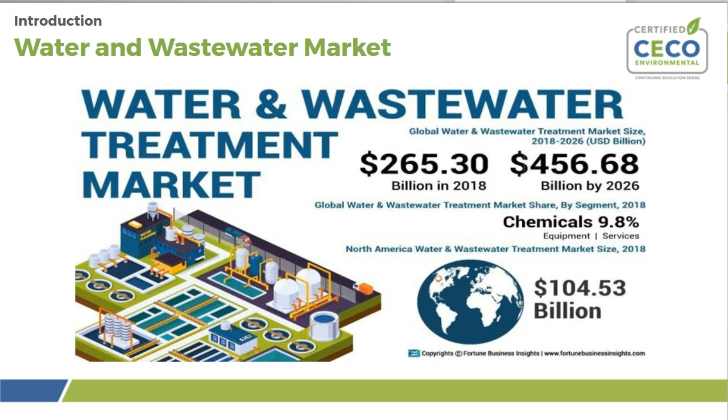Here are some high-level overview facts, some of which may be a bit surprising unless you do a lot of Googling. For example, each American uses 82 gallons of water a day in their homes—that's a lot more than I realized.

Looking at the next one, 22.5 trillion gallons per year of wastewater are generated in North America, with 16.1 trillion of those treated—which makes me wonder what happens to the other 6.4 trillion gallons. Reducing that number is part of why the wastewater market needs to, and is, growing at the rate it is.

The next point: 80% of water used in the U.S. is for irrigation or thermoelectric power plants. That makes me think of just how much water is being used. If individuals are under the 20% mark, and 80% is used by just that industry, it really makes you think about how much water we're actually using.

Then there are some other interesting facts, including almost 1 million people in U.S. cities lacking sustained access to basic sanitation and wastewater treatment, and a little over 600,000 people in U.S. cities lacking sustained access to clean water.

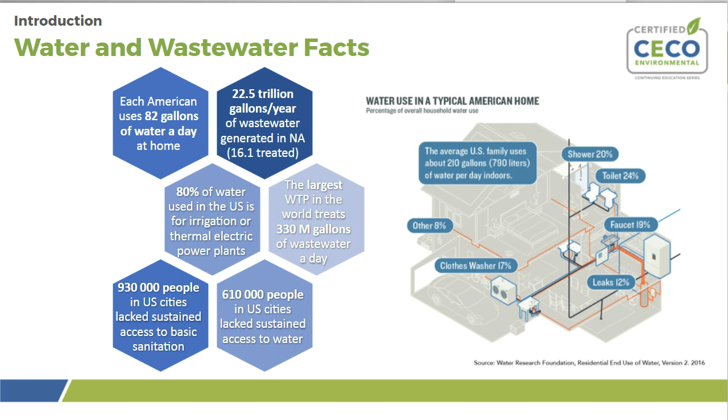So I'm going to break a presentation PowerPoint rule here, and I am going to do some reading off of this slide. But the reason for that is I'd like you to pay close attention to the visual on the left side here, just as an overall understanding. This doesn't address everything, and it definitely doesn't get into all the fine details, but it gives you a good visual understanding of all the ways water is used in our society, where it goes, and where it comes from. So let me read on as you continue studying that visual.

So I want to describe the difference between water and wastewater and the types of treatment. Wastewater treatment refers to the physical, chemical, and biological processes used to remove pollutants from wastewater before discharging it into a body of water. On the other hand, water treatment refers to raw and untreated water obtained from an underground aquifer, usually through wells, or from a surface water source, and then it's pumped or flows to a treatment facility, ending with potable drinking water.

So again, just to highlight that visual on the left, it makes you wonder how big this infrastructure is, how it's all tied together, and whether we as a society are doing everything we can to ensure we're making the right decisions here, capturing the water as best we can and not wasting it.

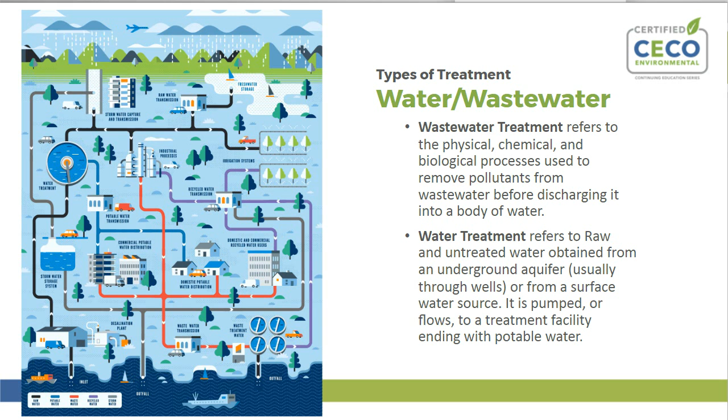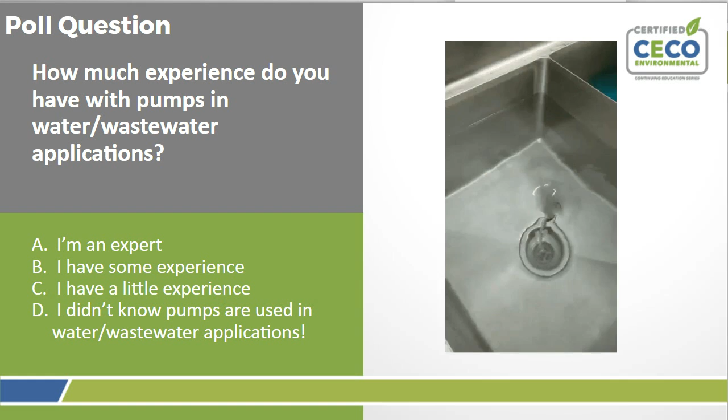So we're up to our first poll question. You'll be able to answer in the next slide. Just hold on a second. The question is: how much experience do you have with pumps in water and/or wastewater applications? A, I'm an expert. B, I have some experience. C, I have little experience. Or D, I didn't even know pumps are used in water or wastewater applications. You can place your answer here, and after selecting, don't forget to hit the submit button.

All right, let's see what the answers are at this point. Very interesting. So we have a few of you that are experts and over 80% that have some experience. That's really good, because this presentation will go a little bit deeper into the pumps. But even for those in the 'discovering this' category, we're still taking a high-level approach, so I think all of you will find this very beneficial.

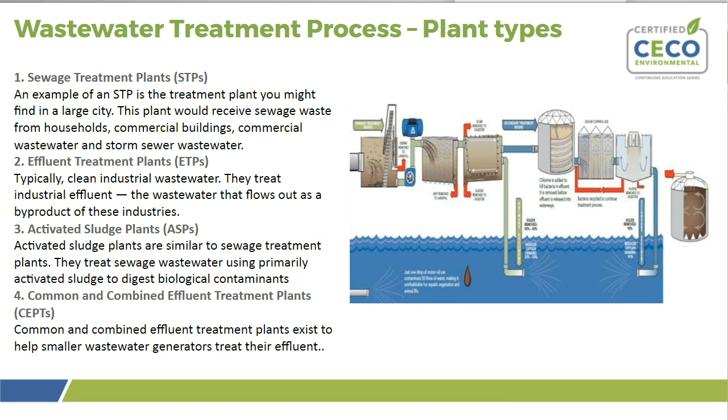So it's broken down, and we started looking at what a wastewater treatment plant is, from both an industrial and municipal wastewater perspective. Industrial wastewater, although many components are the same between the two, really covers the mechanisms and processes used to treat wastewater produced as a byproduct of commercial activities. In a lot of cases, the industrial wastewater is then converted either for reuse inside a process at a mine or power plant, as cooling water, or it's released to a sanitary sewer or back into surface water in an environment such as a river, stream, lake, or aquifer.

Municipal wastewater is a little different. We commonly refer to that as a sewage treatment plant, where water is treated to remove a lot of solids, and it's conveyed in a combined sewer or sanitary sewer and treated at a wastewater treatment plant. So, like I said earlier, we're going to separate wastewater and wastewater treatment from water treatment and keep those separate. Although in some cases they're the same, for our example today we're going to talk about wastewater treatment plants discharging their effluent into lakes, streams, or aquifers.

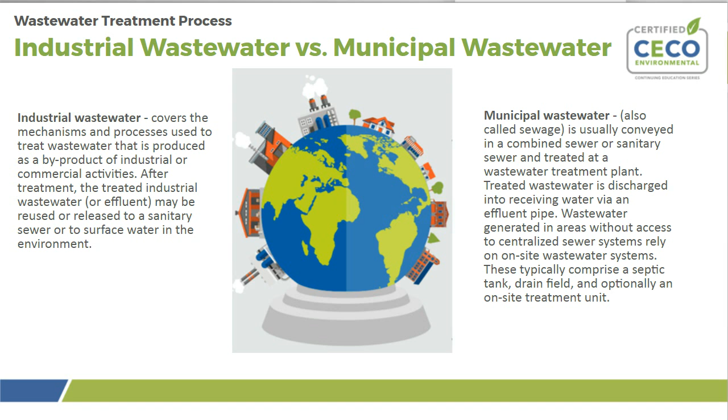When we looked at this fairly significant market, one we're all used to and don't quite understand as much as we probably should - I know that's the case for me - I really looked at trying to break down the sections of pumps and wastewater and where they apply. There are a plethora of different types, and a plethora of applications that relate to where these pumps are applied.

We're not going to go through this a lot in detail, from both a centrifugal and a positive displacement standpoint. There's a lot of information here, but there's primarily two basic pump types that are used: centrifugal and positive displacement.

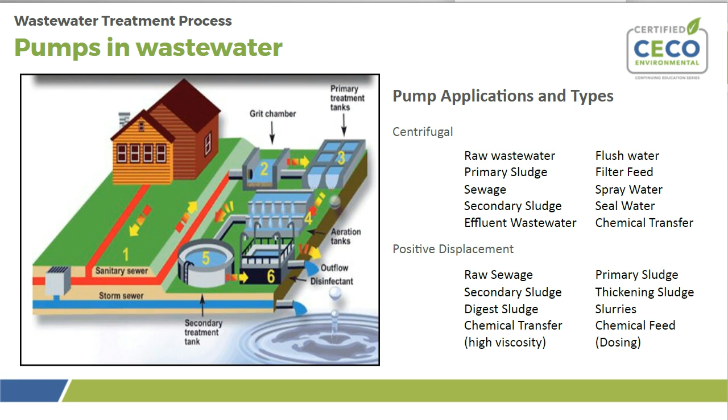One of the things, at least in Canada - I'm not so sure it's the same in the US - is combined versus separated sewers. Combined sewers carry both stormwater and wastewater, and separated sewers are either sanitary sewers or storm sewers.

That makes a huge difference, as we have issues in cities, especially around our coastal cities, where our storm sewers or our sanitary sewers are overflowing, and storm sewers now are being contaminated with human excrement and things that shouldn't be in our water streams. So part of the growth in water wastewater overall is looking at migrating more to combined sewers, so that all water is treated, not just sanitary sewer water.

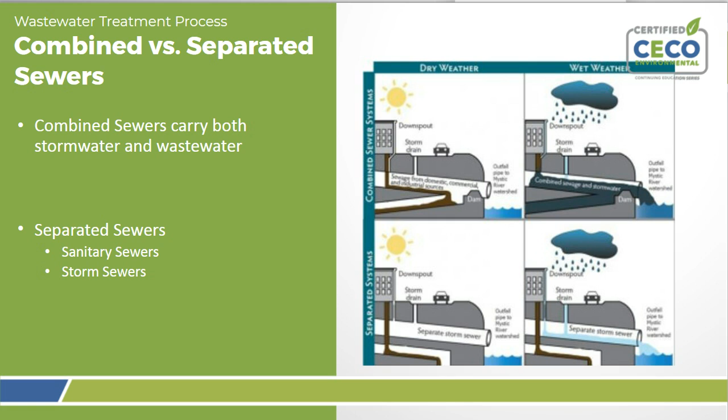A couple of interesting things we've learned along the way is the difference between influent and effluent. Influent is the water that flows in, so raw, untreated water. And effluent is the sewage or industrial liquid waste that is released into natural water by sewage treatment plants or structures that treat industrial water. Kind of interesting - I always thought effluent meant the same thing regardless of application or process within the wastewater treatment process, but that's not true.

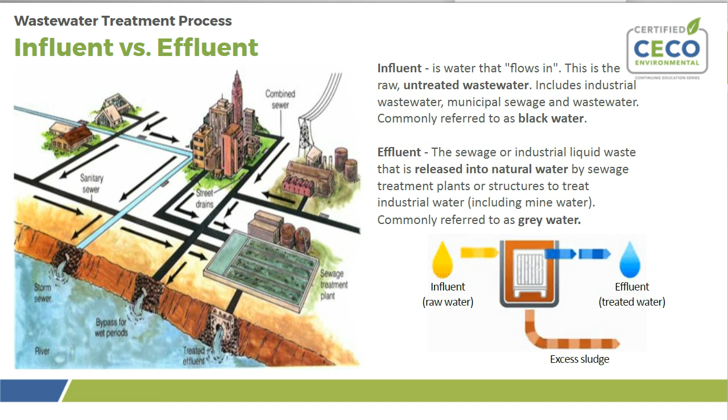So let's get a definition of wastewater treatment. A treatment plant uses a series of treatment stages - primary and secondary - to clean water so that it is safely released into a lake, river, or stream. So we're looking at a waste treatment plant not having the additional stages and purification of drinking water. We're looking at it from a perspective of waste treatment, taking influent and allowing it to become effluent, to be released in a number of ways, and that could be to a waste treatment facility.

So primary treatment removes about 60% of the suspended solids from water. It also involves aerating, putting oxygen back into the wastewater, screening, pumping, aerating, removing sludge and scum, killing bacteria, and handling wastewater residual solids. Then the secondary part of the treatment removes 90% of the suspended solids.

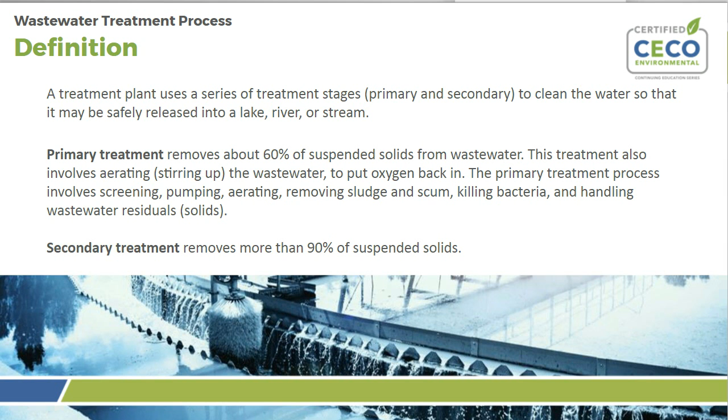If we look at a wastewater treatment plant, here's a picture of a typical wastewater treatment plant, broken down into 10 primary steps. I'll take a quick deep dive into what these steps are through the process on the next slide.

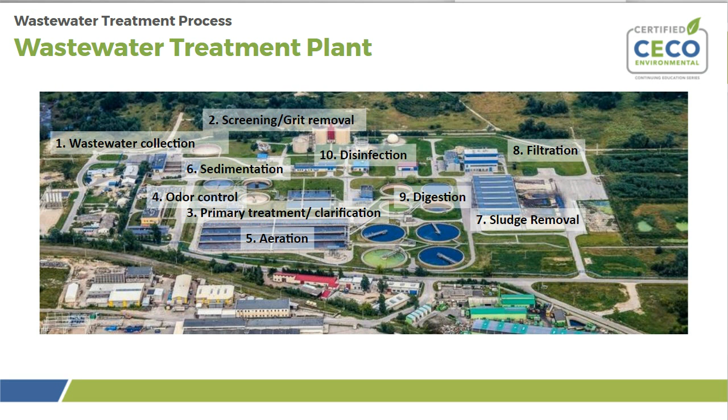It really starts with wastewater collection - that's from industrial and municipal storm sewers, wastewater and sewage on the influent. So it's collecting all that and making sure it gets into the actual wastewater treatment plant itself.

A real important stage is screening and grit removal, which is moving the water through screens to separate the larger trash and solids. A third part of the process is primary treatment, or primary treatment/clarification. This is basically settling - it allows materials to settle to the bottom, be scraped off, and be disposed of as a treatment after drying. The fourth component is odor control.

This is something over the last 25 years that's really gained a lot of ground, especially as wastewater treatment plants are being surrounded by residential areas. So the need to reduce odors is becoming more and more pronounced.

Aeration is the fifth step. It provides oxygen to bacteria for treating and stabilizing the wastewater - a real important step in the process to break down organic matter, containing carbon, and form carbon dioxide and water. The sixth step in the process is sedimentation.

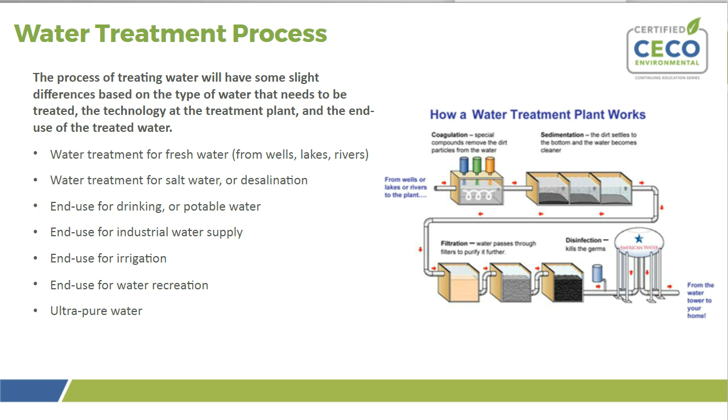Quick definition: water treatment, or treating the water, improves the quality of water to make it specific to the end use, as I just described. The treatment process is fundamental to human health and our well-being as a society. And as I mentioned, the overall focus of this is going to be taking water, raw water, and then cleaning it to a potable use application.

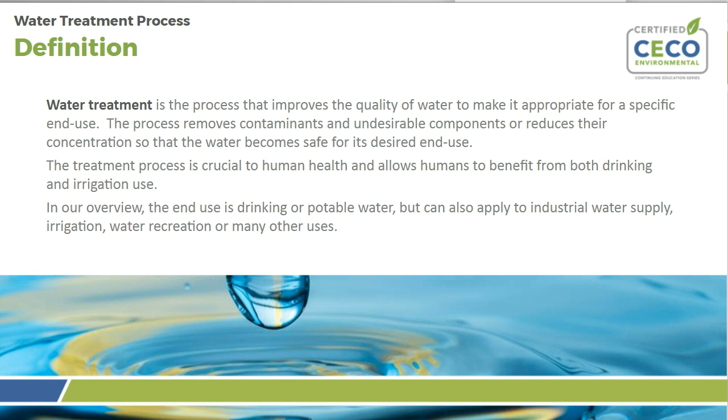So a water treatment plant, very much similar to the picture shown before—again, a little bit less infrastructure to support water treatment than wastewater treatment. Again, very important to us as a society; clean water is just a really important topic in general. As mentioned before, 82 gallons a day used by a household in the U.S., and globally it's somewhere around 16 gallons a day. There's no lack for the need of clean water every day around the globe.

So we'll start with some of these treatment processes at number one, raw water intake. As I mentioned before, there's a reduction in steps, so a little bit cleaner as far as the process goes. Raw intake water can be anything from an aquifer, as mentioned, and that water is pre-treated through a set of screens and some pre-filtration to remove the coarse solids. This is very similar to the intake pump or intake process on a wastewater treatment—there's different pre-filtration taking place to get rid of the big items.

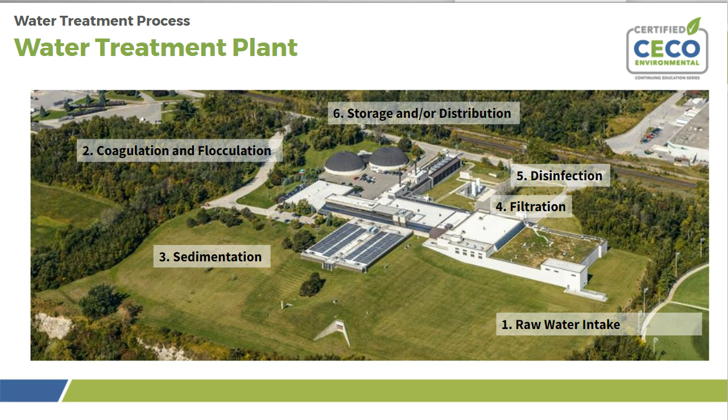I'm going to go ahead and skip this slide, everyone. That was summarized in the previous one, but these are the steps I went over, here for reference in the future.

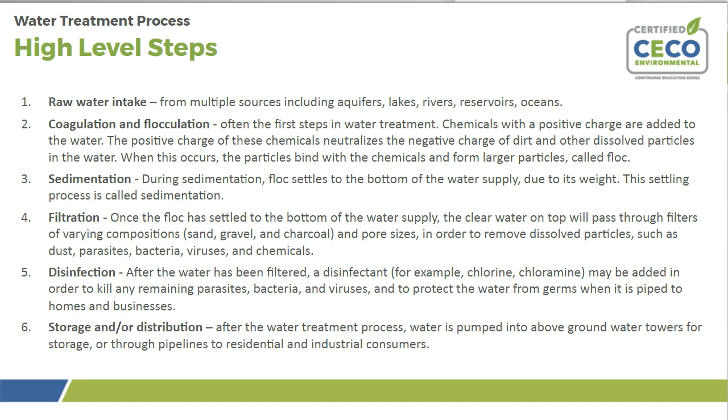So we're going to move into desalination now, but there's some interesting facts to share, to emphasize how important this topic is. Only 1% of the water on Earth is fresh water that's easily accessible - that's water from aquifers, rivers, and lakes. There's also some fresh water that's not easily accessible on a regular basis, tied up in glaciers and things like that. The other 97% of water is some sort of salt water or brine, mostly found in the oceans around the globe. Obviously desalination is really important to us as a society moving forward with population growth. There's always going to be a growing need for clean drinking water, and a lot of that's tied up in a fluid that's not drinkable in its raw state. So desalination is extremely important to us.

Some other fun facts here that are pretty interesting, that I didn't know until I started digging deeper: 1 in 10 people in the world lack a source of clean drinking water. That's sort of mind-boggling in and of itself.

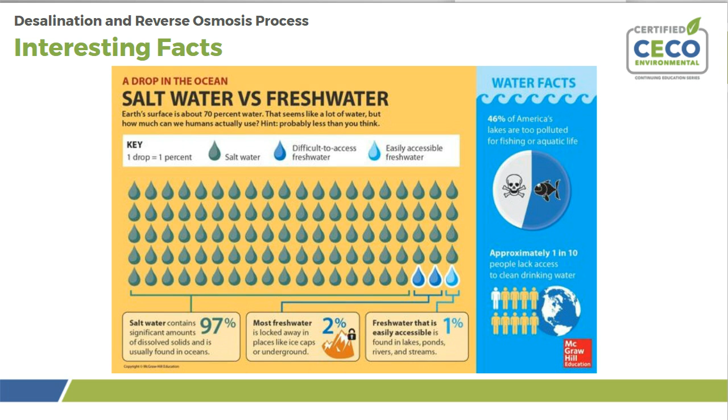So a quick overview of the desalination process. Again, it's not entirely different than what we just spoke about at the first part of the process. We'll get into that in a minute.

Currently there's approximately 95 million meters cubed per day of water coming from desalination, from 16,000 operational desalination plants in 150 countries. So desalination is a big part of what we're talking about as far as treating water. They're treating 95 million meters cubed per day, which is 17 million gallons per minute. But in the public water systems, which are mostly the traditional water treatment system I just discussed, there's over 34 billion gallons of water a day produced. So desalination is just touching the water treatment piece, with respect to gallons per day or gallons per minute. There's a lot of water that could be taken from desalination that's not clean water today.

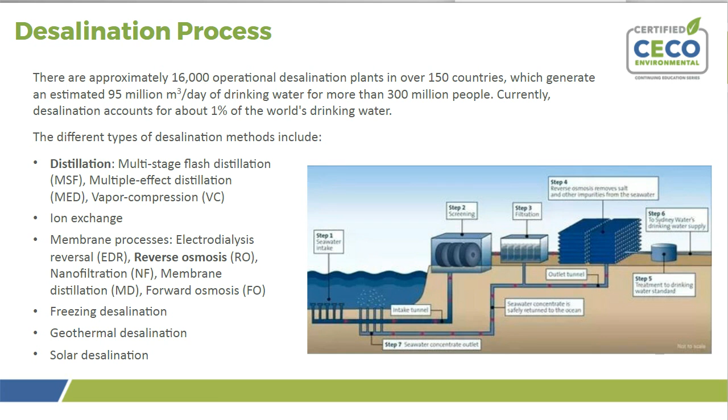Desalination, again, it's just a reminder. It's where we remove solids out of salt water through a couple different methods, distillation or a membrane process. And most of the activities today are focused around desalination and making them more cost effective. Again, these are more expensive processes to operate as compared to a traditional wastewater treatment plant.

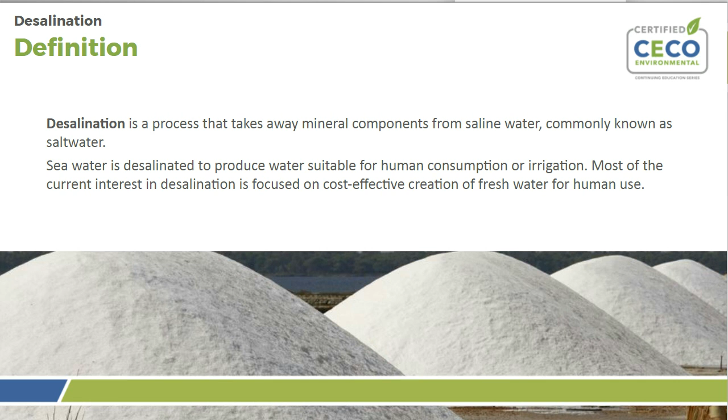It allows the passage of water molecules through, but not the majority of the dissolved salts or organic materials or bacteria that are in the water. Again, a very high energy requirement process. So again, your costs tend to be higher on this type of plant.

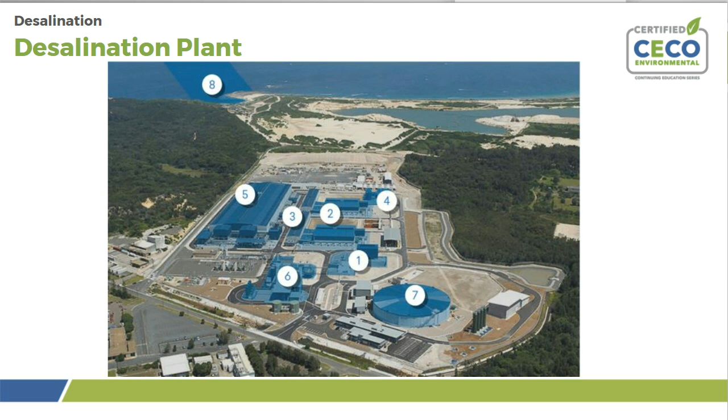And then finally, number 8 out here, there is waste that comes off of this process, some in the form of solids, in between steps 3 and 5, where a sludge is removed. And then after it's all said and done, the brine is pumped underground out to sea, or it can be piped overground, but in this case it's a tunnel or a pipeline that's dumping the brine from the final end of the process into the ocean. Again, this is a slide that covers what I just went over.

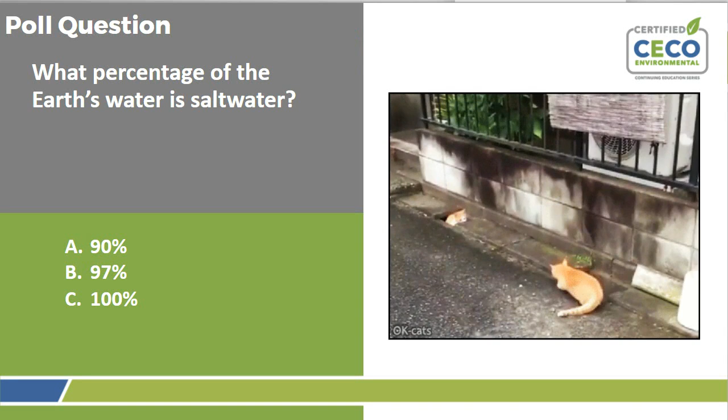All right, thank you so much, Steve. We are at our last poll question, so that's an easy one. I'll just switch over to the answer so you can fill it. So what is the percentage of the Earth's water that is salt water? Either 90%, 97%, or 100%. I'll wait a second, sorry.

All right, so let's have a look at the result. That should be an easy one. 97% majority. So the answer is 97% salt water. So that's why it's so important to look at desalination processes. All right, won't take longer. Mike, take over and talk to us about pumps.

Well, good afternoon again. One of my favorite subjects in the whole wide world is talking about pumps. So, we've got some good information to share with you, kind of related to the topic of today's meeting. I hope you found the information we provided so far useful and informative. But let's talk about pumps. I'm going to do a high-level overview based on pumps used in water and wastewater.

So, a pump is a device that moves fluids, liquids or gases, and sometimes slurry by mechanical action, typically converting from electrical energy into hydraulic energy. Pumps operate by some mechanism, typically reciprocating or rotary, and consume energy to perform mechanical work moving fluid. That's pretty straightforward. I think that's out of Webster's Dictionary.

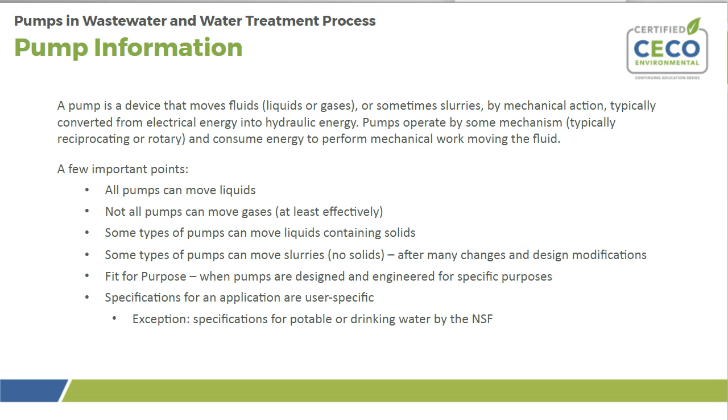Most of the time, from a specification standpoint, those are end user specific or design engineering specific. There's a number of ways to accomplish a single application or process on a number of different pump types. There's one major exception in the United States and somewhat in Canada, as we follow a lot of U.S. certification: potable water or drinking water needs to meet NSF, and I'll talk about that in a second.

So what is NSF? NSF was founded in 1944, called the National Sanitation Foundation. It really is about creating and maintaining rigorous industrial standards. One of the standards is NSF/ANSI 61, and it really refers to drinking water system components and the standards which they must meet. Part of that specification is specifically related to pumps and how they're constructed, materials, that kind of thing. So for the most part, there's no real standards as far as what pumps are placed in particular applications related to water and wastewater, except when we start talking drinking and potable water.

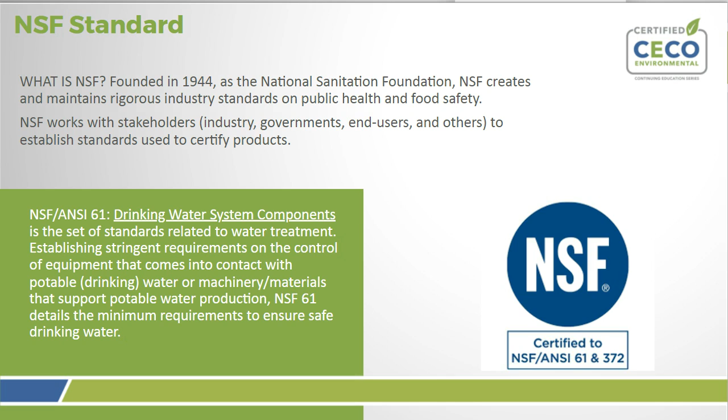So let's talk about pump types in wastewater treatment. Really, again, there's two primary types. One is centrifugal, and two is positive displacement. Centrifugal pumps are by far the most common in any industry, representing about 82% of total pumps consumed in any application, which is probably a little higher percentage when we start talking about pumping sewage and influent. A lot of these pumps are installed in pits and sumps and can easily transport suspended matter, as in sewage.

Some of the pump types that you will see in wastewater treatment are axial flow, submersible grinding pumps, vertical sump pumps, solids handling, self-priming, non-clog, chopper, shredder, recessed vortex impeller pumps, screw impeller pumps, and vertical turbine solids handling. Again, remember, this is referring to wastewater treatment. But in addition to centrifugal pumps, there are applications that are better suited with positive displacement pumps. Some of those are reciprocating, rotary lobe, progressive cavity, and diaphragm, whether that be mechanical or air.

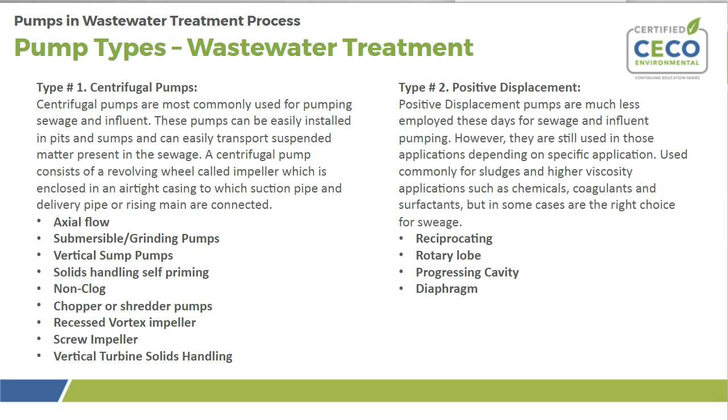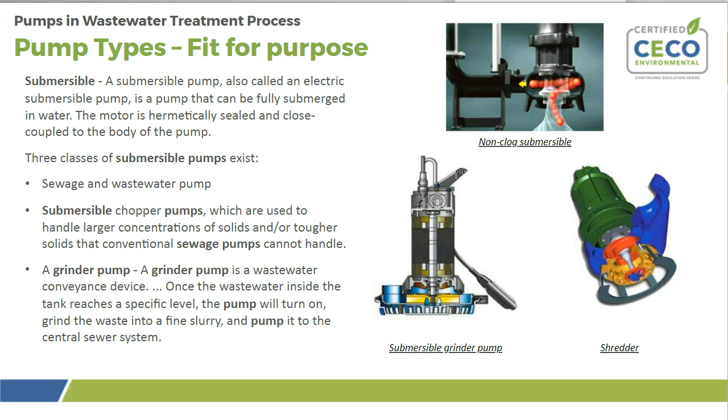There's submersible chopper pumps, which are used to handle larger concentrations of solids and hard solids, and they actually chop up the media. And grinder pumps, which are similar to chopper, only they have a grinding medium on the impeller that helps break down the solids. Axial flow pumps. Axial flow is also called a propeller pump. They move fluid actually through an impeller. They provide high flow rate and low head, and they can be semi-adjustable by adjusting the pitch. Not necessarily solids handling, but they move a lot of wastewater.

The recessed vortex impeller, also called a recessed impeller pump, basically creates vortex flow by having the impeller recessed, which is outside of the path of the liquid. Again, very common, very good at handling stringy solids, very common in wastewater. Mixed flow: the impeller discharges fluid in a conical direction using a combined radial and axial pumping action. And finally on this slide, a screw impeller. A screw centrifugal pump combines the advantages of a screw pump with the advantages of a centrifugal pump. It's very unique and effectively handles thick sludges or large stringy solids, shear sensitive fluids, and delicate materials, and is becoming more and more common in wastewater.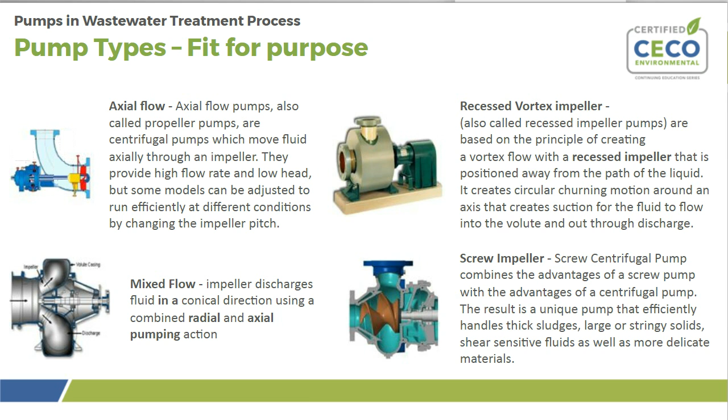We talked about submersible pumps. Submersible pumps are ideal if you want to mount them in a sump, whether that's a dry sump or a wet sump. But in some cases, you don't want to mount your pump in the pumpage or have the means to have a dry sump, so you have it horizontal, surface mounted, and you have a solids handling self-priming pump, which, depending on the application and how it's installed, makes it a lot simpler, and you can mount it above the liquid, and it's designed in such a way that it's self-priming by design.

Another very common pump is vertical non-clogs. Again, it's a version of recessed impeller pump or a specially designed open rotor, a very specific fit for purpose for pumping abrasive solids and slurries in a vertical concept. Solids handling vertical turbine. These pumps are specifically designed to pass solid sludge, trash, and long stringy materials. Vertical turbines are often in conventional wastewater applications where you need to move a lot of flow and a lot of volume. Used in water applications as well. Chopper shredder pumps. We talked about them earlier in the submersible versions, but there's also horizontal and vertical configurations of chopper and shredder pumps as well.

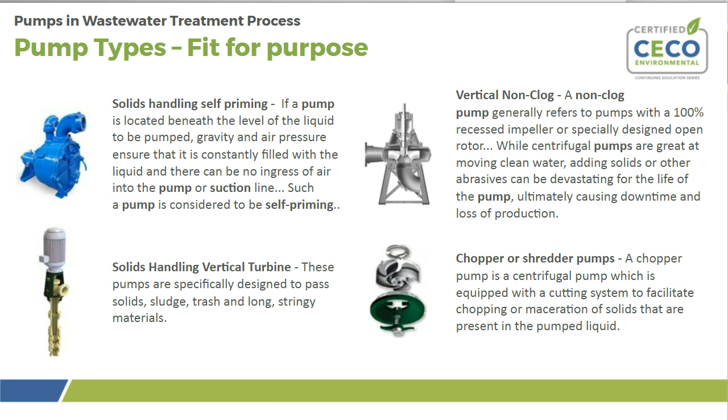So as you can imagine, with what's in your influent, you need to facilitate chopping or macerating solids. I will quickly run into pumps in water treatment. Again, it's fairly similar. You've got two primary types, centrifugal pumps or positive displacement. Again, in this market segment, centrifugal pumps are used to a far greater extent than positive displacement, but there are applications where positive displacement pumps are used as well.

So again, we'll go into them on the next slide a little more, but the vertical turbines, submersibles, self primers, horizontal split case, vertical sumps, mixed flow, propeller pumps, end suction, general purpose, and ANSI. If you go into a water treatment plant, you'll see pumps of all kinds of variations and descriptions, but there are a few that are specific and fit for purpose. And on the PD side, reciprocating, rotary lobe, progressing cavity, diaphragm, peristaltic.

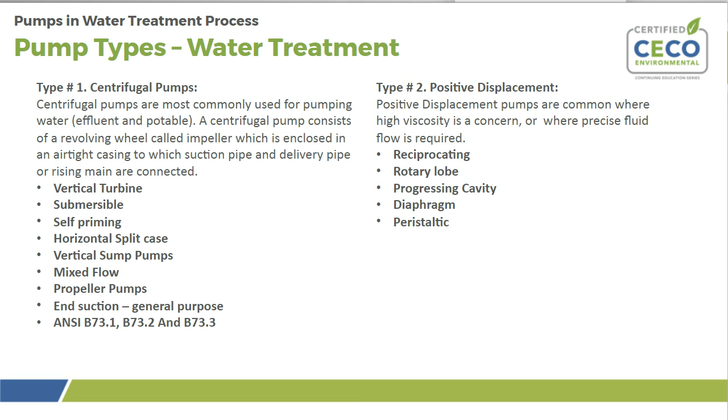We talked about vertical turbines a little while ago. The differences here, they're not fitted exactly the same because they're not going to worry about solids. Again, moving high flows at medium heads. Submersible pumps are also common on the water treatment side. As described earlier, we don't worry too much about solids in this particular treatment stream, but the configuration and how it's mounted is beneficial and can be fully submerged in the fluid.

Self priming pumps, as we described earlier, although this is not necessarily solids handling, it's the same concept where you have a suction lift and you don't have the ability to have a pit or a basin or a sump. You can have a pump laying horizontal and being able to provide a suction lift. If you want to move a lot of fluid, a horizontal split case is commonly used. As the name implies, the casing is split into two separate chambers. This configuration on suction and discharge flanges is available as well, but ideally it moves a lot of fluids.

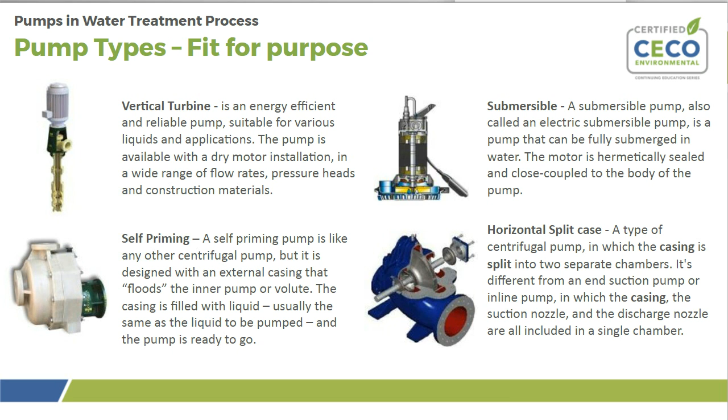Vertical sump pumps, they're actually used in both the water side and wastewater side. And in this case, when we look at industrial wastewater, they're used for a lot of runoff applications, especially industrially, even in your home, that kind of thing. But they're intended for pumping applications to pump clean or lightly contaminated liquids. They can do fibrous slurries and liquids containing solids depending on the specific design.

Propeller pumps are generally handled for movement of high volumes of water at low discharge pressures. Again, pumping water from sources including lakes, ponds. So again, high volume, low pressure. And end suction pumps, as the name implies, the suction's on the end of the pump, applicable to most standard applications where standard fluids need to be moved.

ANSI pumps, regardless of the application, they can be NSF 61 or not, depending on if they're pumping potable water or not, but common within the water process. It can either be horizontal, mag drive or vertical. Mag drive, generally speaking, on the chemical side, which we'll talk about in a bit.

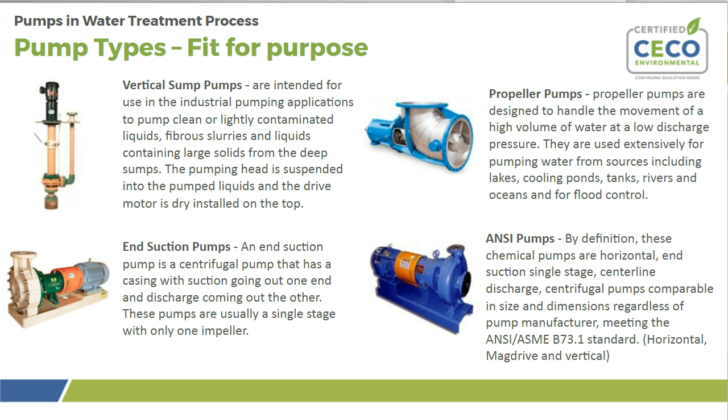Positive displacement pumps. So positive displacement pumps displace the same volume of liquid at any given rotation or stroke. The flow at a given speed remains constant regardless of changes in discharge pressure. So the big thing here is they're capable of pumping higher viscosities. So reciprocating pumps are positive displacement pumps that work on the principle of movement of the piston in a forward and backward direction. Common designs are piston, diaphragm, and plunger. Common piston diaphragm designs are mechanically actuated, hydraulically actuated, and you'll see those in dosing, metering pump applications.

We're running a little long here on time, but there's a section that I have on chemicals and pump applications with chemicals. One of the biggest usages of piston diaphragm pumps and hydraulically actuated metering pumps is in pH control as well as disinfection. And then there's special design plunger pumps that are designed specifically for high solid concentration waste.

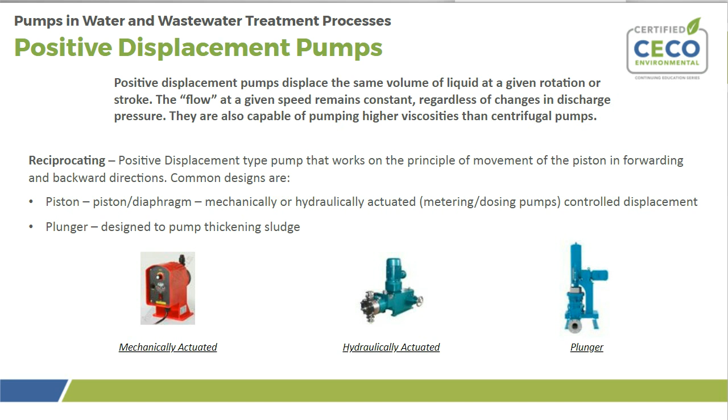One of the most common PD pump types in water and wastewater treatment is the progressing cavity pump. Can handle solids. Can handle slurries and influent containing solids. Very practical, very common in most wastewater treatment plants. Peristaltic or hose pumps. These again are fairly common. Again, depending on the application, they can handle entrained solids without any damage to the pumping components. And smaller versions of the peristaltics in a lot of applications are used for metering.

And then rotary gear, whether that's internal or external, they move fluid with enclosed fixed volume, interlocking cogs or gears. Again, gear pumps are commonly used for pumping high viscosity fluids, polymers, flocculants, etc. And again, the type all is dependent upon the customer, the application, and the design engineer that's working on that specific application.

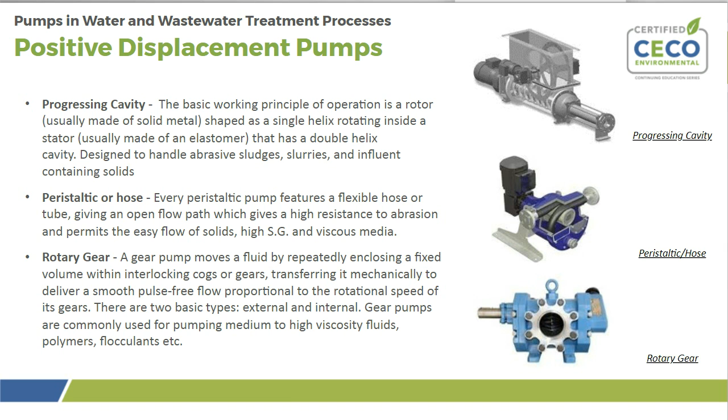I'll just take a quick foray into a couple of sections that are fairly important to us.

One, I talked about this earlier, about odor control and how that particular segment of the process is growing. Wet air scrubbing is one, and it's one CECO takes a big part in. We have a scrubbing division, but we also supply, both with our Fybroc brand and Sethco brand, pumps into that market from a chemical compatibility standpoint.

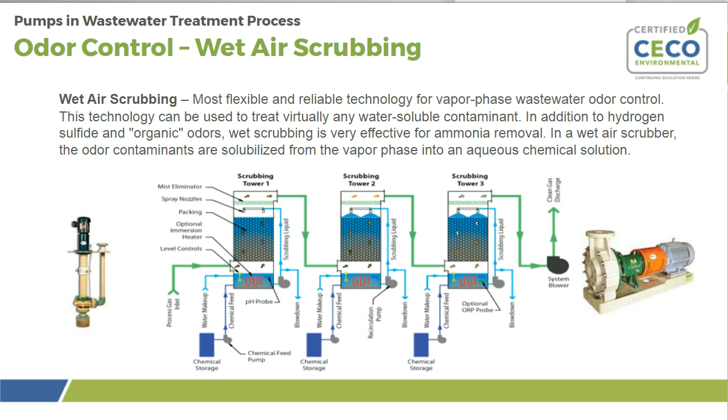From a pump perspective, we're looking at chemical transfer applications, whether that's centrifugal, as in a Fybroc pump, or dosing and metering applications, where you want a specific volume of liquid put into a line or process at a specific rate over a certain amount of time.

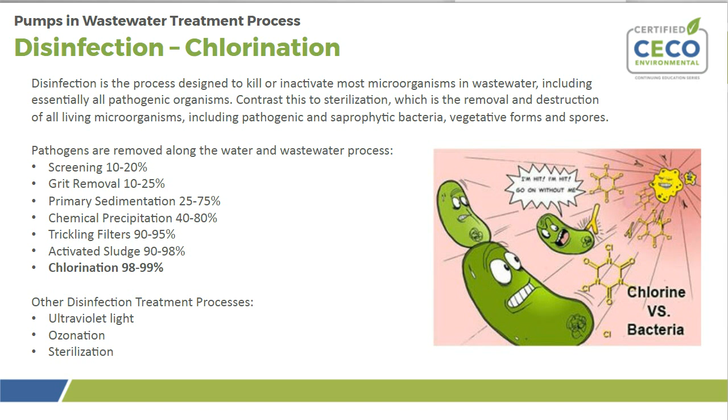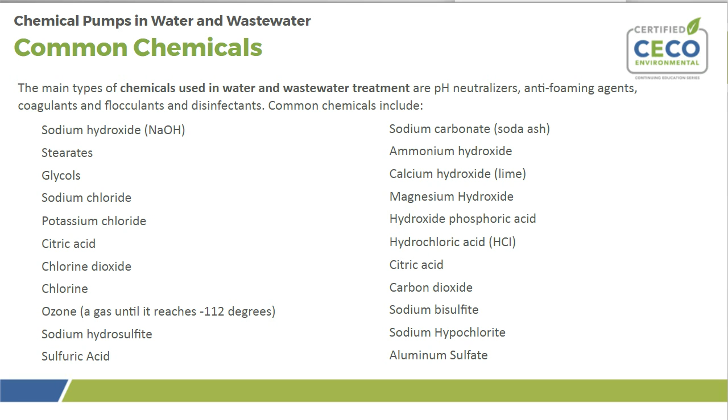In this specific area of chemicals, there are a lot of fit-for-purpose pumps designed for applications where chemical compatibility is important. For us, chemical corrosion is a big issue because one of our primary lines is either thermoplastic or FRP, so corrosion is a major concern, especially with different chemical compositions and their effects. I think I'm just about out of time here.